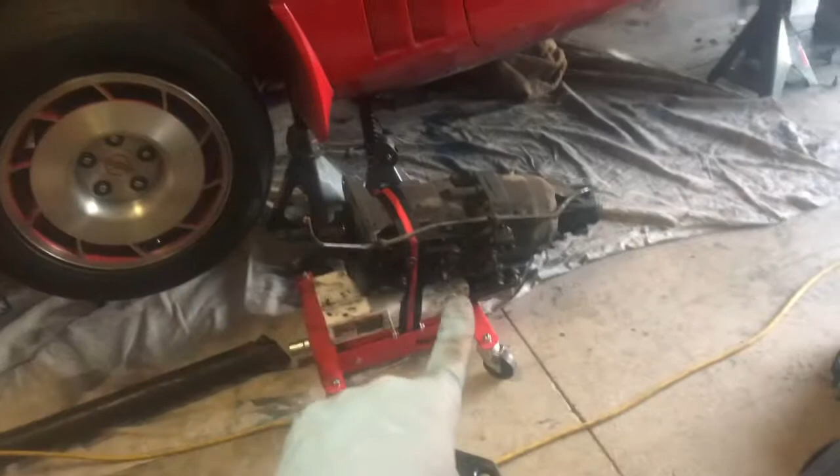Last video, you saw I took out the transmission. We're gonna do more to that, clean it up, make it look all pretty before we put it in. But in this video, we're gonna be taking apart the old clutch and putting in the new one. So, to the Haynes manual.

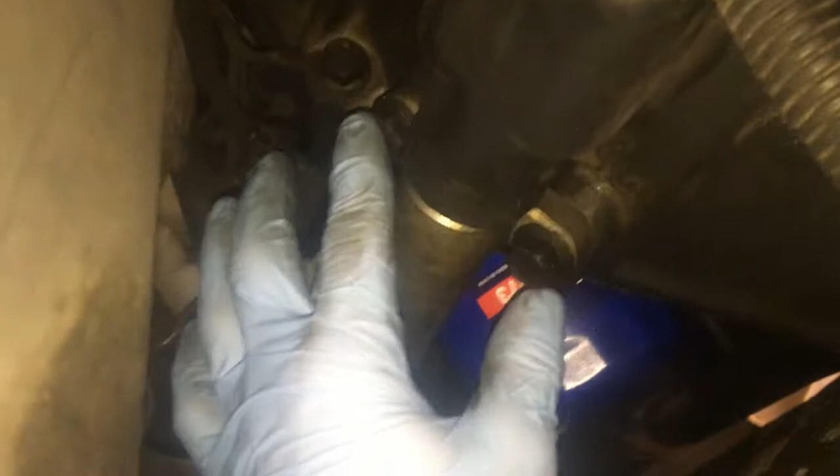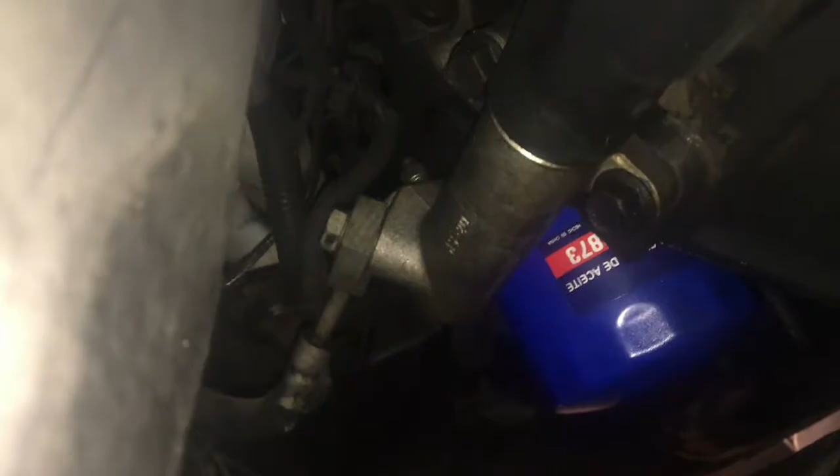First we'll start by taking out the slave cylinder and then the clutch housing. The slave cylinder is here on the driver's side. Looks like 15s, probably two of them. Don't need to disconnect any hydraulic lines, it looks like. So I'm just gonna take it off, let it hang somewhere, and that should be good. All right, got the clutch slave off.

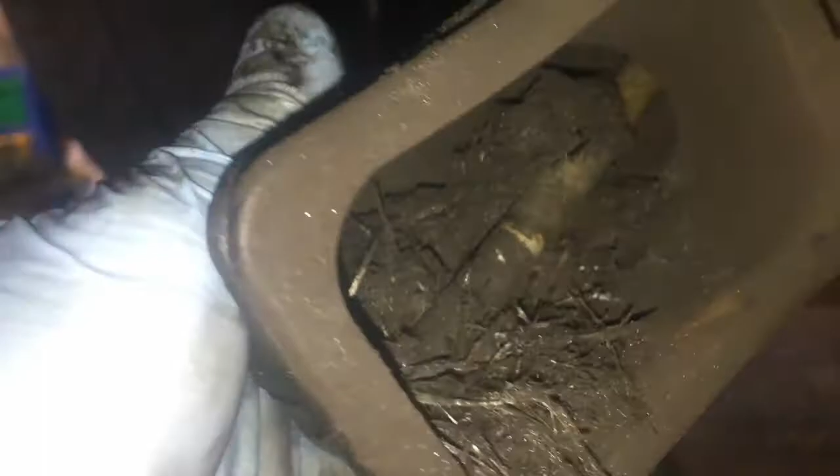Whatever this stuff is, it's like fiber, so much of it. This slave cylinder had a little dust boot, you just pop it out, covered. So I wonder if it's just this throw out, or the clutch fork, maybe the throw out bearing, whatever went. I think it's just this. Maybe the clutch is good, but I'm still gonna replace the clutch either way.

So now I gotta take out this clutch housing, or the bell housing as everyone else knows it. I'm taking off these bell housing bolts. I'm just gonna call it bell housing even though the Haynes manual says clutch housing. I had to take off the bolts facing the other way for this shield, whatever it's called. It's basically like a big dust shield for the bell housing.

So there's 2 bolts on either side, just like the engine and transmission bolts were. And then there's 2 on the top, it looks like, possibly 1 more in the middle. But it looks like that's all I need to get off.

Here's the bell housing area. I'm gonna take it out from another angle to get a better look at it, but here's the clutch, or the pressure plate I should say. Here's more of this debris stuff that we saw in the last video. It's way back there. Okay, this might actually just be clutch material.

Do I have to remove the starter to get this out? Oh, it looks like we got the pressure plate now, and then we can take a look at the clutch. You can get a little sneak peek there.

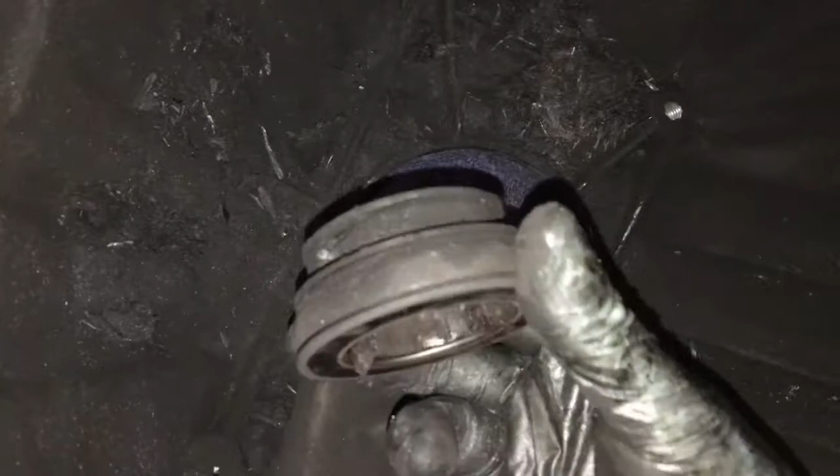So my big concern is what all this stuff is. Throughout this, I'm gonna try to figure it out. My first thought was clutch material, maybe some clutch and oil, but that's a lot, that can't be clutch. Possibly the slave cylinder, as we saw earlier. But look at this throwout bearing, it's destroyed.

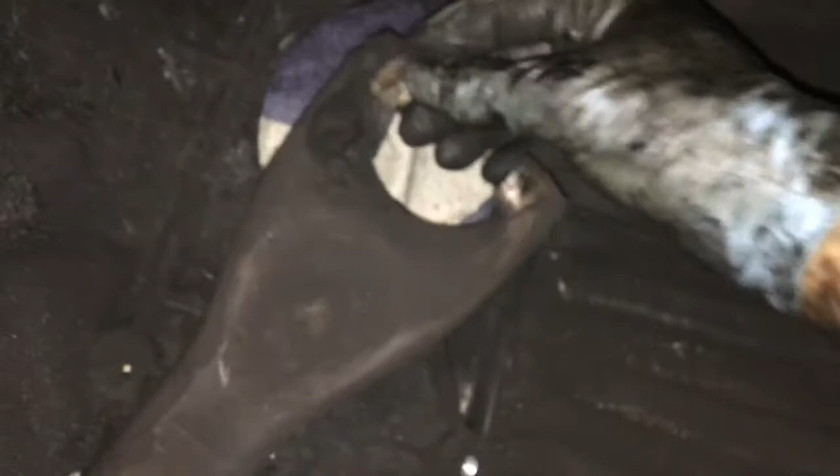You can see this silver metal stuff everywhere in here. So it looks like a lot of this material is from this, but I'm not sold that all of it was just from this. Although, this is absolutely destroyed. The clutch fork looks okay. I'm gonna hope that it's not damaged, because that would really suck.

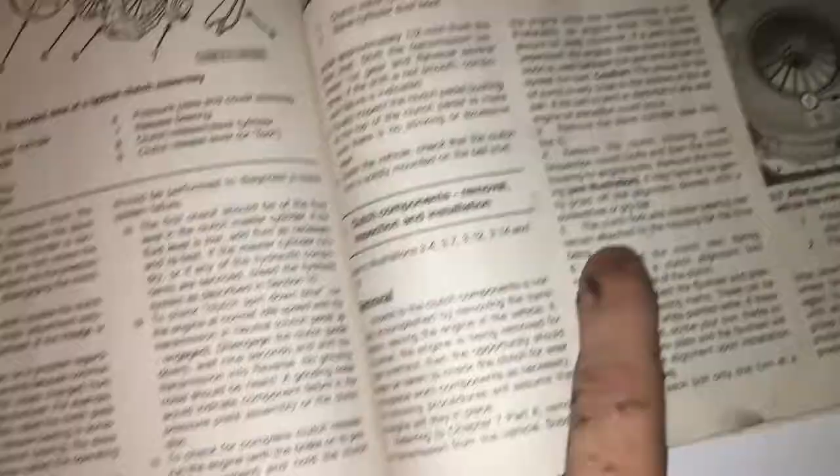The next part on the Haynes manual says I need to support the clutch disc with the clutch alignment tool. So I gotta open up the new clutch. I figured might as well show you guys what I'm throwing in here, replacing this old beat up clutch system. So it's the LuK clutch. I saw a couple comments on forums saying they were pretty good.

Here's the pilot bearing and clutch alignment tool. This is what we're going to be needing. I'll go ahead and show you. This is the throwout bearing. It looks a lot different from the old one.

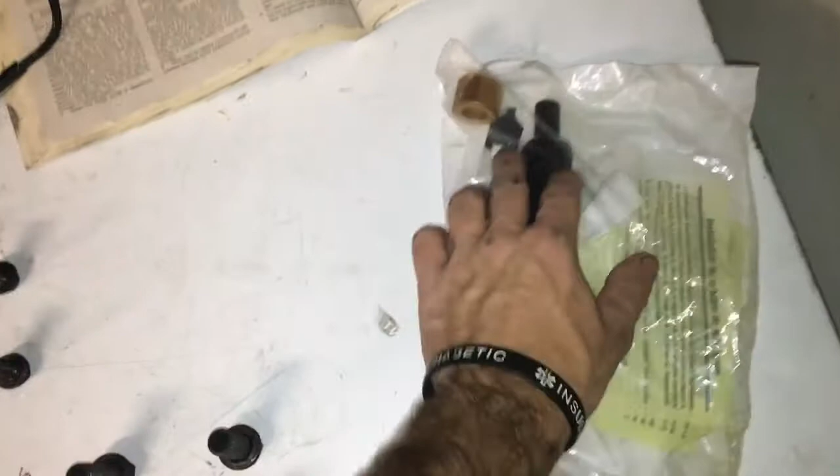And this is the pressure plate. I don't want to touch the clutch material with my dirty hands, but there's a glimpse at the inside of the clutch. So it's just a stock replacement, nothing fancy, but these stock clutches are actually known to be really good power-wise, they can handle power. Alright, so let's get this out. Oh, it even comes with some lube.

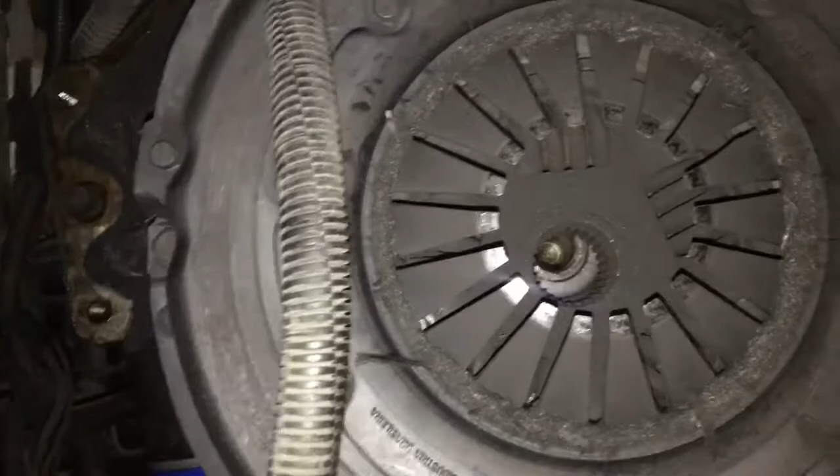Let's get this out and get ready to remove this pressure plate. Alright, we got the pressure plate here. Got my clutch alignment tool. I'm gonna try to look at my camera because I don't really have a good angle of this, but I just gotta line it up and slide it in. There we go.

So the clutch alignment tool's in. Now I undo the bolts. It's like one here, there, there, there, there.

It's like 6 bolts. It's gonna spin when I do it. It's only torqued about 25 to 35 pounds, but it's gonna spin. I'm gonna have to get creative on how I'm gonna hold it, but it's doable.

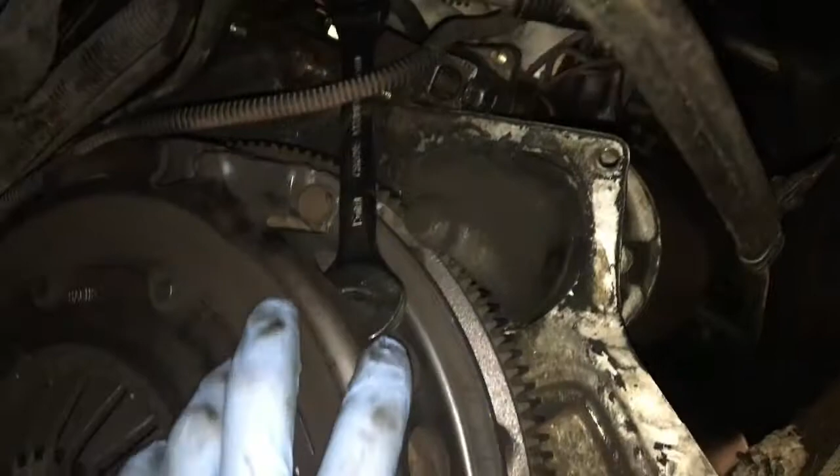Now to stop it spinning, I shoved a wrench in here and put it against some sort of bracket. That's what's stopping it from moving. I kind of did it on accident. I wanted to use a wrench and then I started spinning and it worked, so I didn't touch it. I just went around and loosened all 6 of them.

Now I'm going to use my electric ratchet to take them off one by one. You want to take them off evenly to avoid warping in the flywheel, I'd assume.

Alright, before I look at the clutch, first look at the flywheel. Not too bad. I see a little bit of marks, but doesn't look that bad at all. Pilot bearing in there, definitely looks newer, but yeah, doesn't look like anything's wrong with it, but I'm gonna replace it since I have it anyways.

I just rubbed against the clutch. Oh my, this thing is destroyed. Are you kidding? I think it's safe to say a lot of that material is this. That thing, oh my.

And here's a look at the pressure plate. Definitely some marks on it.

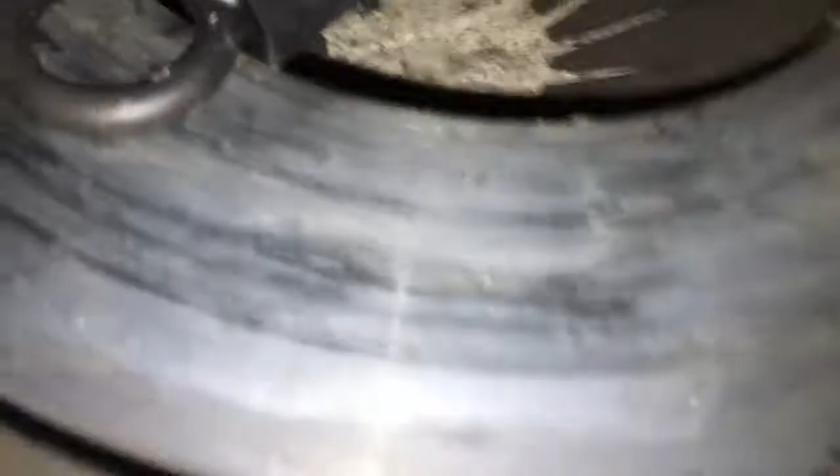Oh man, after seeing that clutch, I think it's worth it to get the flywheel resurfaced. Or maybe just do a light little touch up.

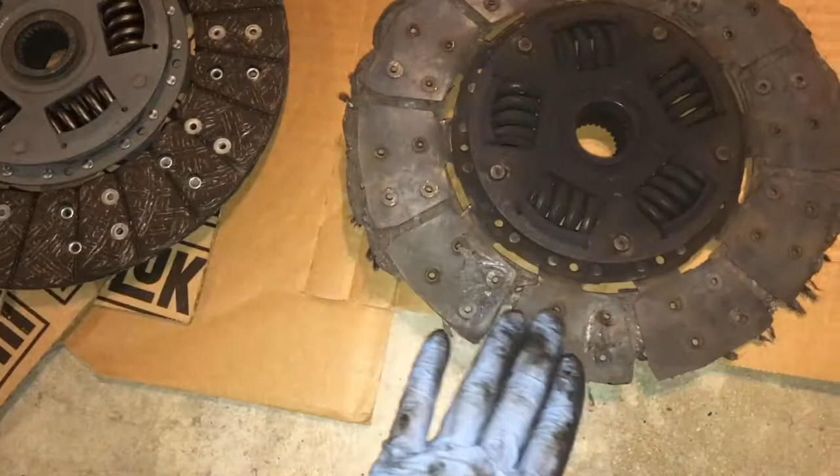But here's your problem. Here's the new one. Look at all of it. This is worn past the rivets. Like even some of the rivets are wearing down. Let me flip it over. I'm trying not to touch the clutch material because my hands are all dirty.

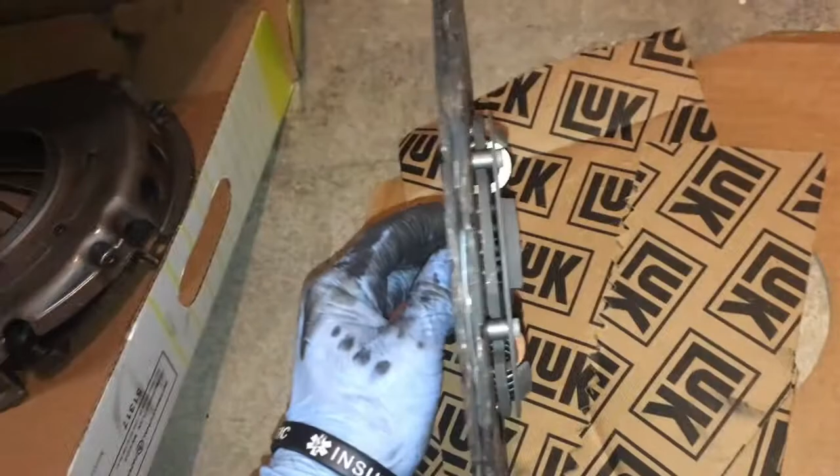Brand new one, absolutely destroyed one. This is where all this stuff came from. It's clear now. That's insane. Look, this one has like 2 layers to it. This one, absolutely mangled. That is insane.

So to assess the damage: clutch, obviously, absolutely destroyed, mangled. The throwout bearing as well, the whole bearing material destroyed. Possible the clutch fork needs replacement, probably not, probably be able to salvage that. It looks like the slave cylinder went bad.

I'm going to keep doing research, clean it up. Maybe it just got filled with gunk, but it's about $30 to replace, so kind of leaning towards just replacing it anyways. Who knows how old it is. I'm pretty sure it's been replaced at some point because this car has 150,000 miles or more.

Then from taking the car apart, we destroyed the second gear sensor. You can't really see it, but when I took it out, it fell in half in the transmission. So I got to go to a junkyard, pick that up, and put this back together.

I don't think that's actually messed up. And then this air hose for the exhaust, I broke it in half, so I'm just going to buy a rubber hose. I don't think this gets too hot because I don't see any discoloration like this, so I think just a rubber hose will be enough, with some hand hose clamps.

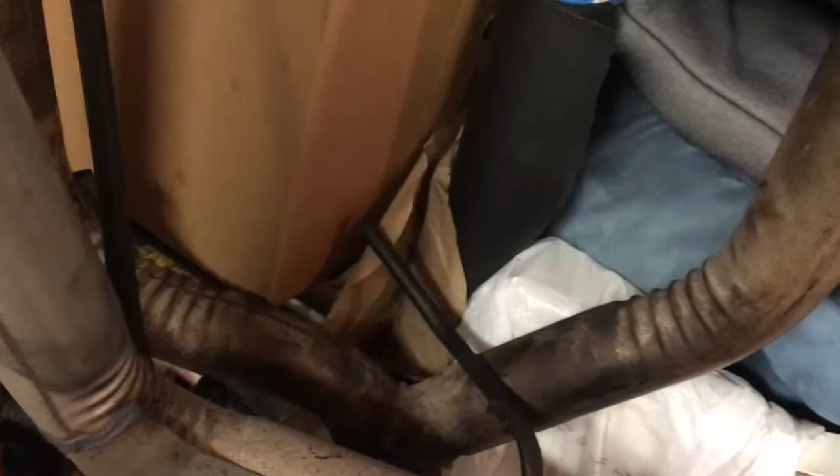But let's see, other than that, that's it for the damage.

So it's morning now. I ran my fingers across the flywheel, and the inside edge, just around the circle, feels rough, and it should feel really smooth. So I think it's worth getting it resurfaced. Plus, a lot of that clutch material has ended up behind the flywheel. So I'm gonna take off the flywheel.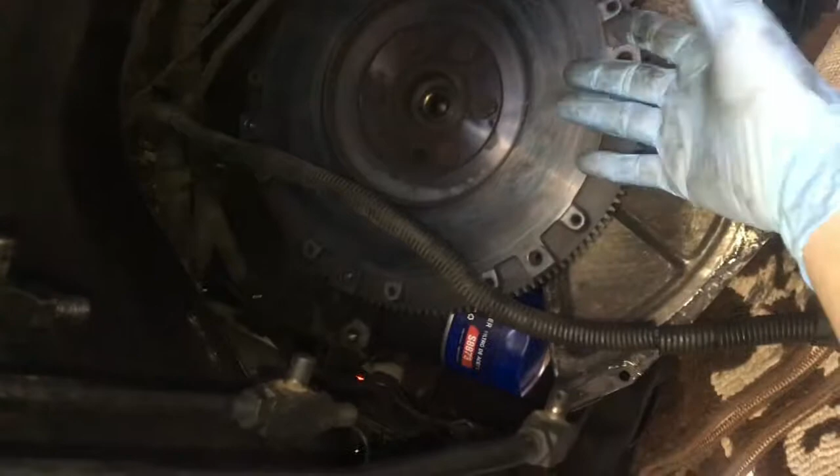I got my impact gun here. I'm gonna take it off and just try to get as much of that clutch stuff out of there. And we'll see if the rear main seal's leaking, but it doesn't look like it is.

So we'll take a look at what's behind the flywheel. Here it looks like this is the crankshaft. Looks like the main seal's back here. Possibly it's leaking, I'll have to figure out exactly where the rear main seal is.

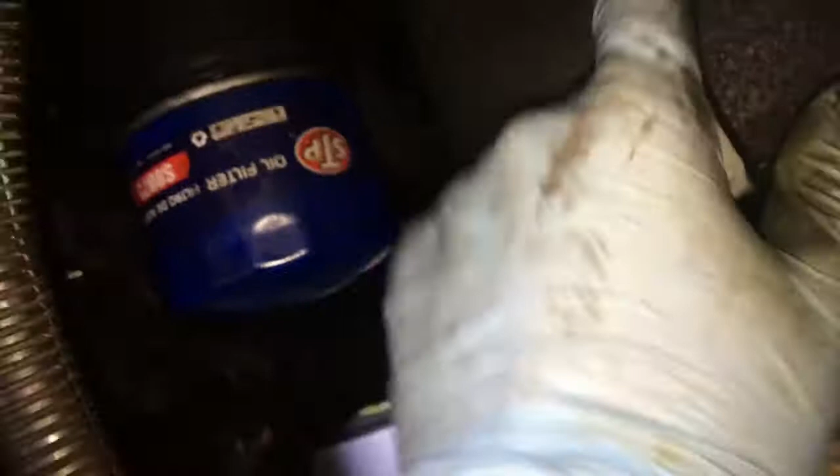Because if it's leaking, might as well replace it now. There's definitely oil here, so maybe worth a shot. I'll investigate some more. Some of the clutch material's in the starter, that could have been bad for starting it.

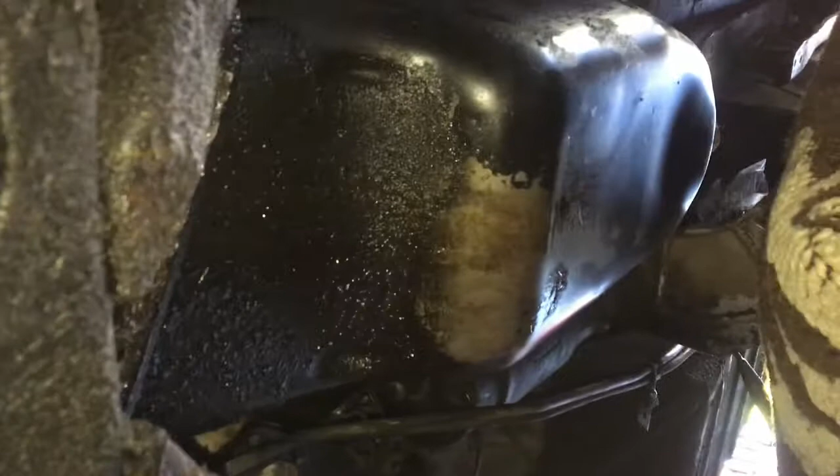I was going to order a rear main seal and replace it, but this car has a two-piece rear main seal. There's the top part like a normal one, and then the bottom one that goes into the oil pan gasket.

Because I know there's an oil leak. You can see all this oil. This is at the front of the engine. It is caked under this K-member. The suspension stuff is caked in oil.

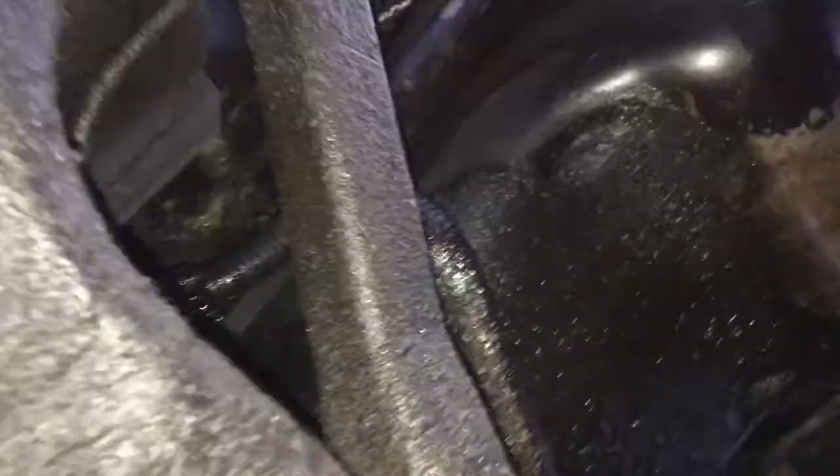But this, looking at it now that the rear main seal is exposed better, it definitely looks like the leaks from the front are coming down. It looks like it's still happening. It's most likely some sort of hose or something leaking, not the valve cover. So I did fix the valve cover leak, but that wasn't the only leak. This is definitely pressurized oil that's leaking.

So I don't really need to worry about that yet. That will be a different time.

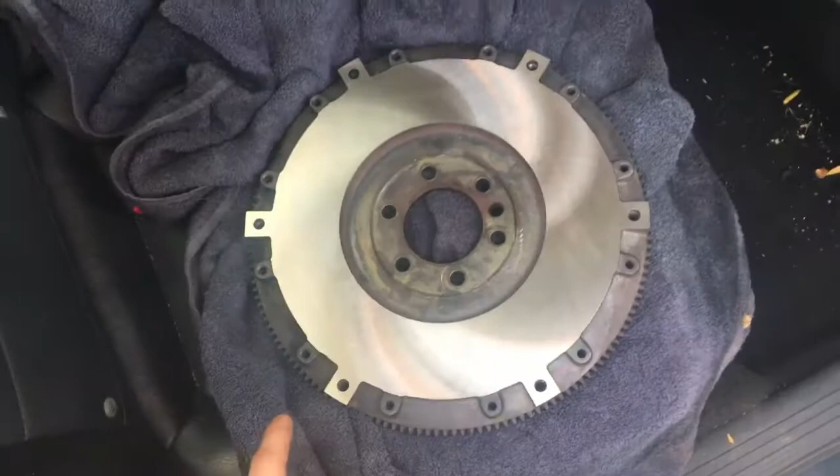So today I got the flywheel for the Corvette resurfaced at a machine shop. They're located in Riverside, called Arlington Machine or something like that. They did pretty good work. You can see all the little hatch marks.

I went to the junkyard, tried to pick up that second gear overdrive sensor, but the transmission was gone, so that was a bust. But I did pick up one of the flywheel bolts since it was easy to get to with the transmission gone. So I'm ready to start reassembling.

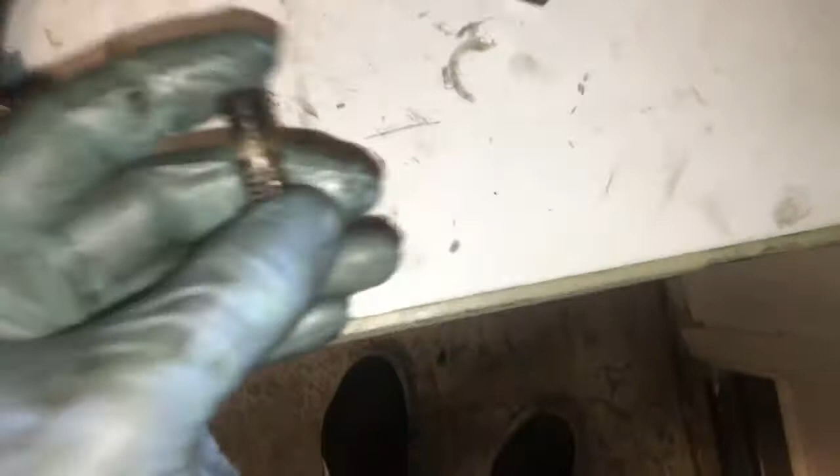Okay, so I just got the broken exhaust stud out. I'll have to show you guys the tool, but here's the tip of it. Here's the stud, you can see where it broke. This tool just clamps on and then spins it off freely. So now we're in business.

Alright, now to work on putting the new clutch in the car.

Alright, so I'm going to take out the pilot bearing. I'll have to get creative, but looks like a lot of people like to use a socket or something that fits in there and use bread as a hydraulic source to pull it out. Actually, guess it's easier with the flywheel off. Alright then.

Alright, so this is the old pilot bearing. Here's the new one. Now they don't seem to be directional or anything. Line them up, looks like they match. So we're just gonna see what happens when I slide it in.

Alright, resurfaced flywheel's in. Got this dust shield tucked behind it. The bolts are just snug right now all around.

I'm gonna pull up the torque spec. Alright, just got it all torqued. These heads are American size, but I only have metric stuff for 1/2 inch drives for my torque wrench. So I got it torqued to about 66 foot-pounds.

Alright, so I got the clutch here. Trying not to touch the material, but I'm going to put the alignment tool in it. And then I'm going to slide the clutch up to the flywheel, putting it into the pilot bearing. Something like that.

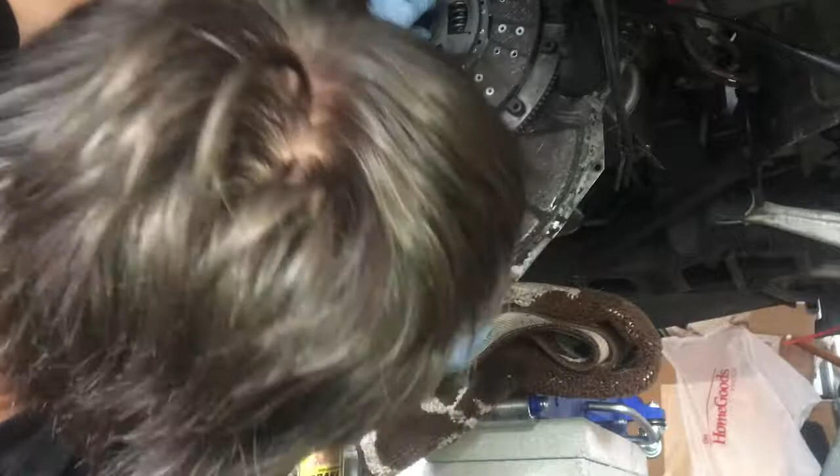Okay, so I got my pressure plate bolts, got a little mark on the clutch alignment tool. Get my bolts out, ready to be used. And then I put my pressure plate right up to it.

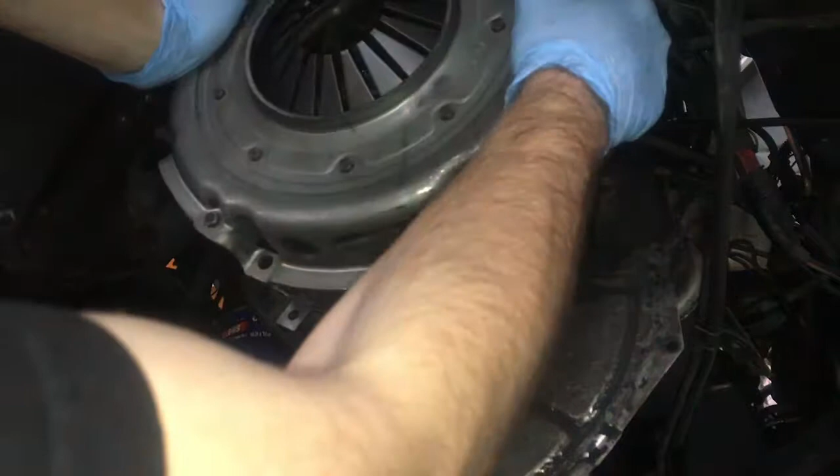Alright, got everything finger tightened. Just gonna do a quick little tighten with the ratchet, trying to go as even as possible.

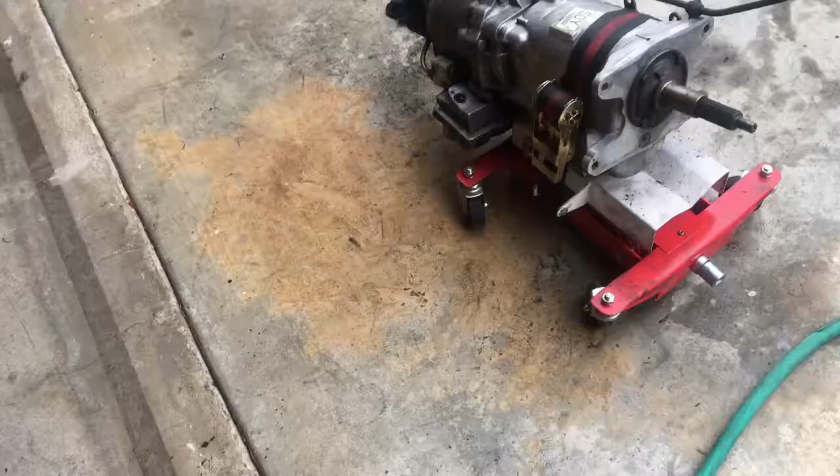Just finished cleaning up the transmission. A little bit of brake clean and engine degreaser from AutoZone, and then I had a couple detail brushes and some rags to wipe it down. But now it's not caked in oil.

Alright, so the pressure plate gets torqued to about 35 foot-pounds. Set my torque wrench, and then just go around in a crisscross pattern.

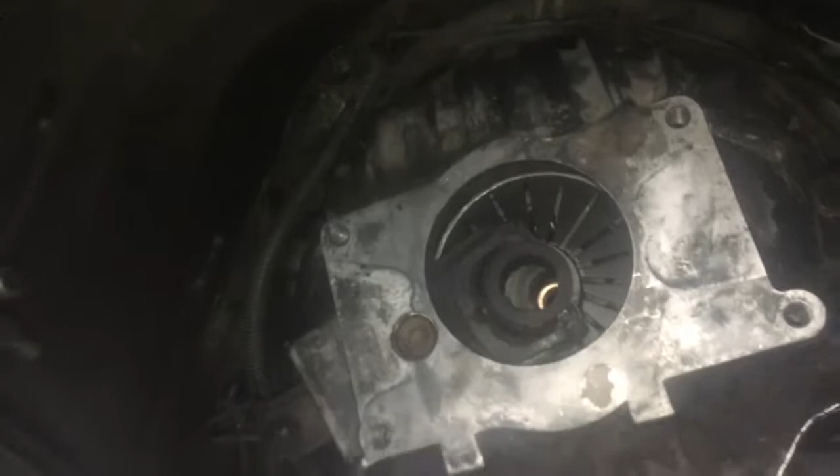Alright, so I have the clutch housing back on. It's just snug, not torqued.

So I spent a lot of time trying to put the transmission in, and it was coming up a few inches short, or about an inch short from bolting up to the engine. Realized I had to take it all apart. Found out the pilot bearing, when I installed it, wasn't perfectly straight, wasn't in there all the way, so that was my bad. So I got a new one, got this little 1/2 inch extender thing, and I'm just hammering it in. And it's almost in there all the way.

So I got it in. You can see the pilot bearing needs to be flush with that line on the crank. I don't know if it's the crank, it's the outside of the crank maybe, something like that. It needs to be flush with that line.

When I first did it, I didn't know. I only pushed it in not even a quarter of the way. Just pure, I didn't know.

I finally got the transmission in. It didn't take that long once the pilot bearing was actually installed correctly. You can see it's all lined up. I just used the electric ratchet to get it snug. So I'm about to go and torque it all.

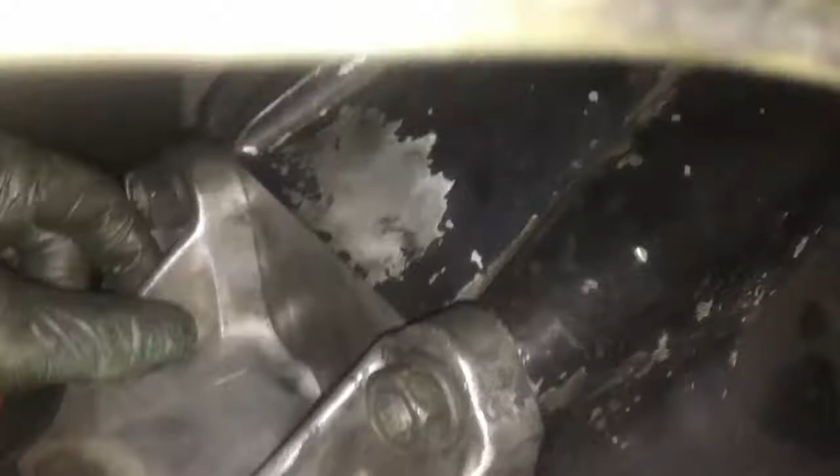Please, I can't thread this bolt.

Got the transmission in, and the C-beam way back there. This was like our 50th millionth time putting the transmission in this car in just one clutch job.

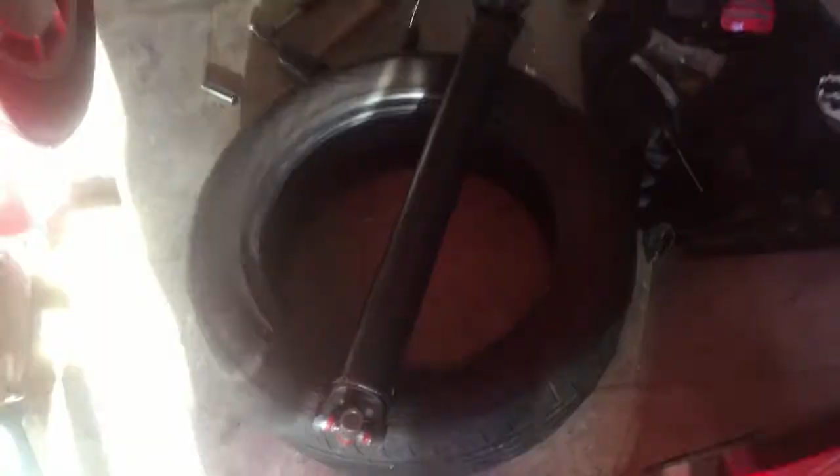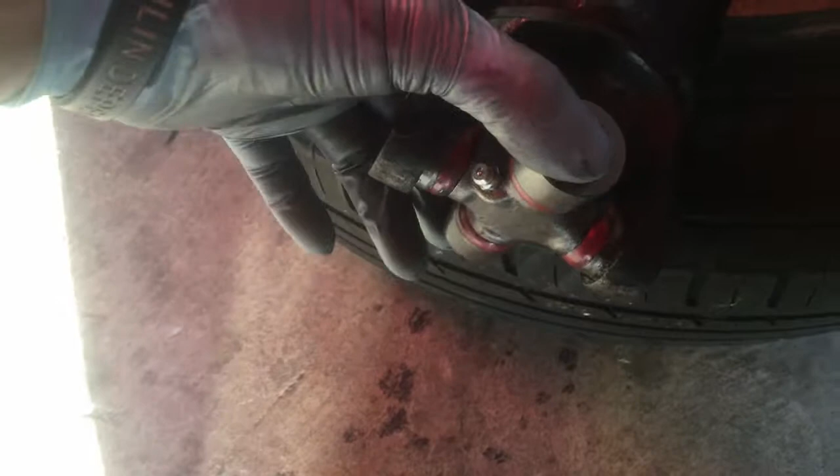So when I was putting in the drive shaft, the U-joint kind of exploded on itself. All the little needles, some of them cracked. So I picked up this new one. This one needs to be greased. I don't have a grease gun anymore, so I gotta figure out what I'm gonna do.

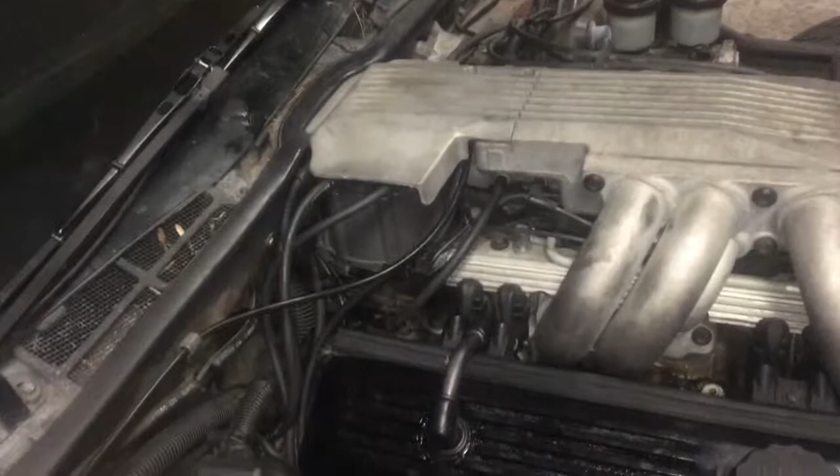And just like that, I got the distributor back in. When I got the car, the wires were pretty all over the place. I mean, it's not perfect, but it looks a lot better than it did before. Before they were just all like a rat's nest under here. Let me show you the other side, but basically, not too bad.

I just got to figure out what I'm going to do about greasing the U-joint, and then it's just the exhaust. There's little wiring for the transmission sensors and the shift linkage I need to adjust, and that's about it.

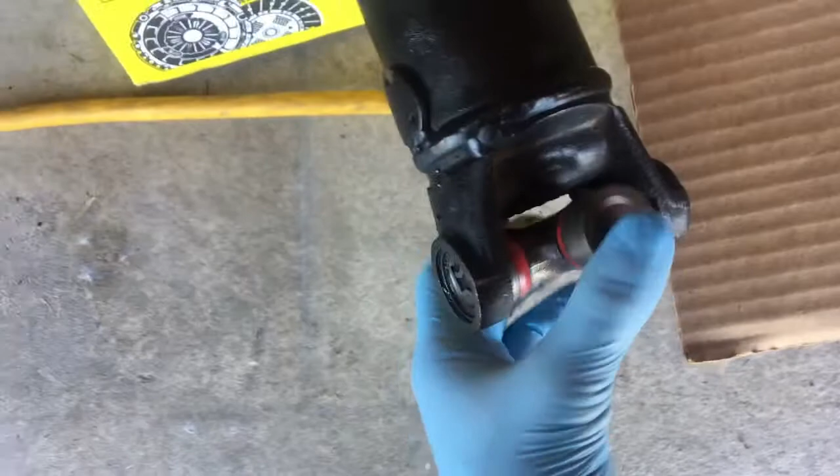Alright, so I got the new U-joint into the drive shaft. Basically the old one fell apart, so I had to get the new one in, and I just decided to replace one instead of both of them. Yeah, I know, preventive maintenance, but you know what, it's not broke. I'm not gonna worry about it. At least it's not that bad to get out anyway.

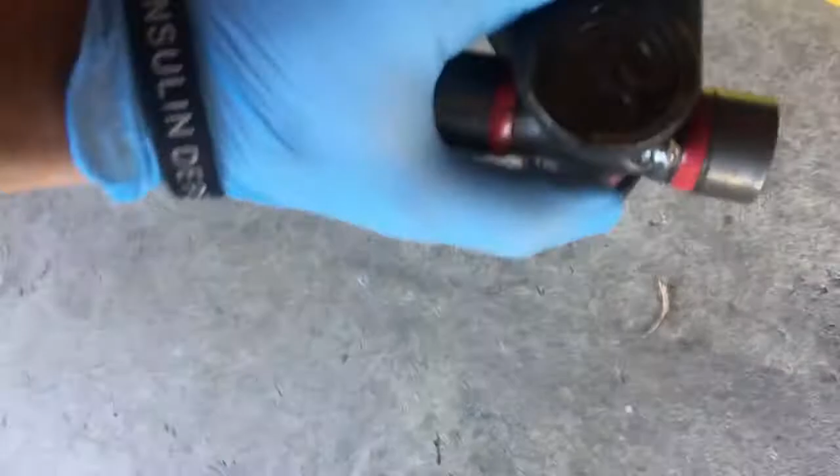So then I took it to a shop to get it greased, so it's all greased now and it's ready to go in. Alright, so I got the drive shaft in.

Right now the shifter doesn't really do anything. It's not hooked up in the bottom. Hopefully you guys can see. Not really, but the arms down there aren't connected to anything. You can see in the Haynes manual, here's the three.

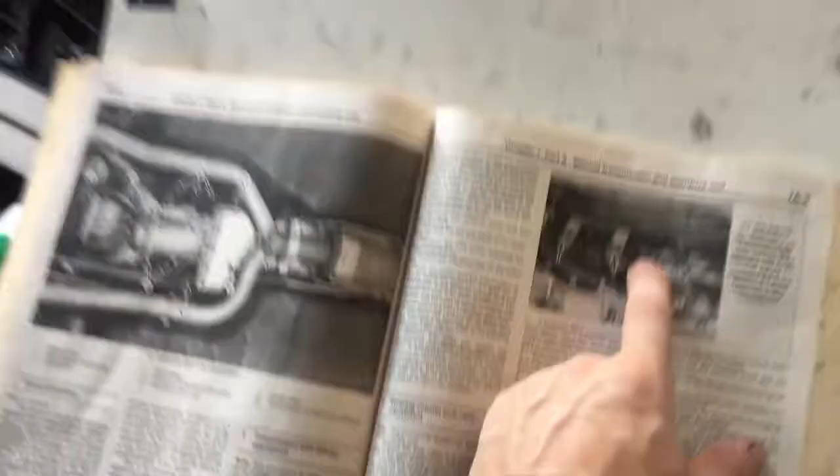They're not connected right now, so I gotta connect them, and then I have to adjust it so it knows what gear it goes in. Because I accidentally moved them, I had to deal with that. But the Haynes manual says, let's see, adjustment. And I gotta take out, I'm just gonna follow this.

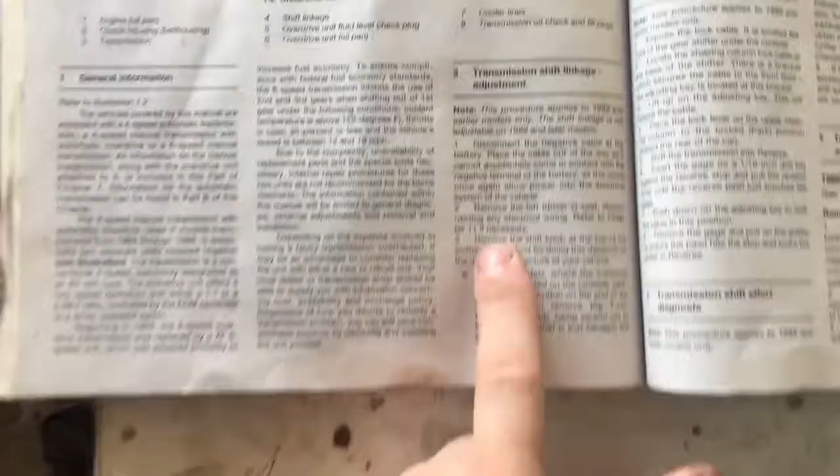So I gotta take out this driver's seat and a couple other center console stuff. In the next clip, I'll show you guys what I did up top, but basically, if you ever take out the transmission, you gotta adjust it.

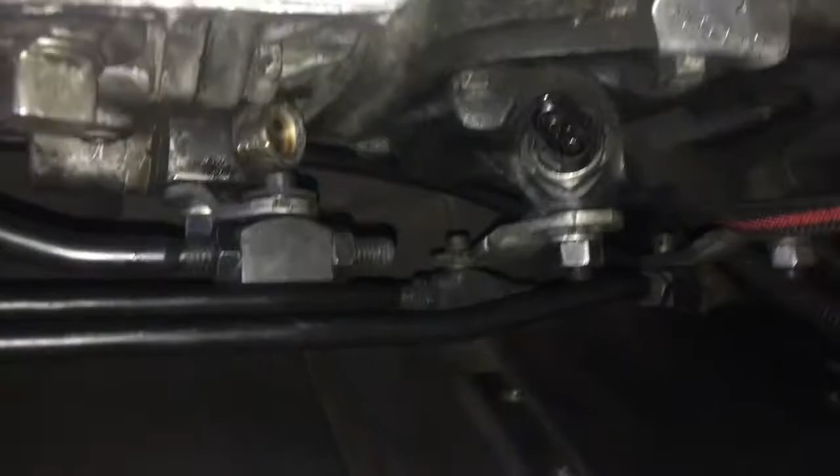This is how it looks from the upside down point of view. This is neutral in the transmission. Basically, everything is straight up. And this one's a little to the front of the car. So now they have these little washers and clips, so I'm just gonna lock these all into place.

So I had to take out the driver's seat. I was following the Haynes manual a little bit to adjust it so neutral would work again. So I took off all this stuff. It's all loose right now, but under here is where the three shift arms are.

But basically my problem was just the transmission was in gear, even though the shifter wasn't. So once I got the transmission, I had my dad come out and help me, and we got them both into neutral, and then it started working, and now it's all good.

I'll show you real quick. Let me sit down. You can see there's first, second, third, fourth, and then you gotta go up into reverse. Now it's kind of hard. I would just assume that's because there's no fluid in here, but not too bad.

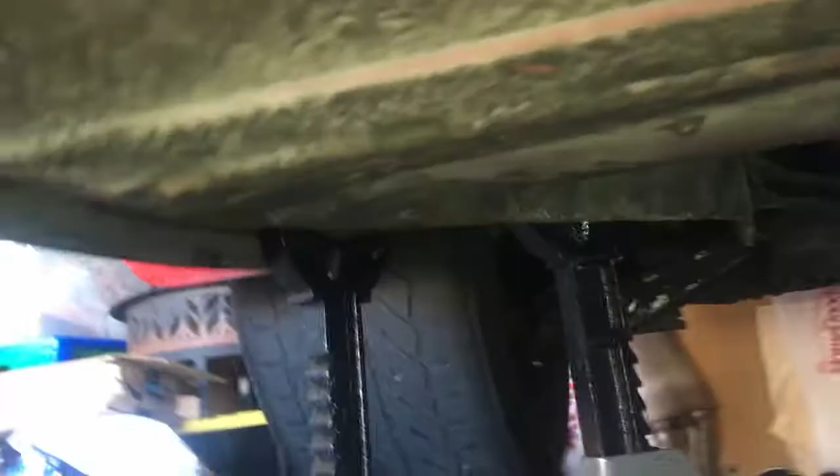So now I'm going to get the clutch pedal working, and then I'm going to start up the car and make sure I don't hear this loud throttling noise or anything like that. Alright, after the help of my dad, got the slaves bled.

Initially I thought the slave cylinder was bad because the piston wasn't moving anymore. Turns out I just didn't have enough fluid in the master cylinder reservoir. So make sure you keep an eye on that. Now the pedal actually has some feel to it.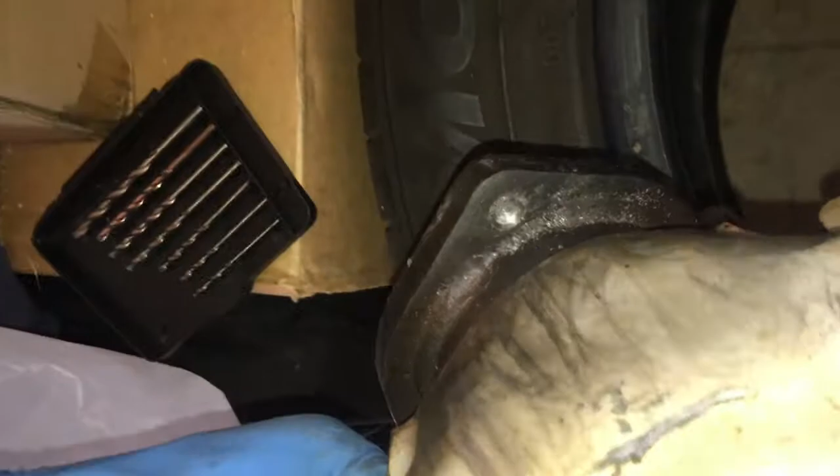So, from doing a clutch job, somehow I got the passenger side exhaust manifold out. I was replacing the studs, as you saw in the last video, and one of them broke. Then this one broke where it's so small my little extractor tool can't fit there. So I've been trying to drill it out and I'm almost done. I just gotta charge the drill up more because it ran out of battery.

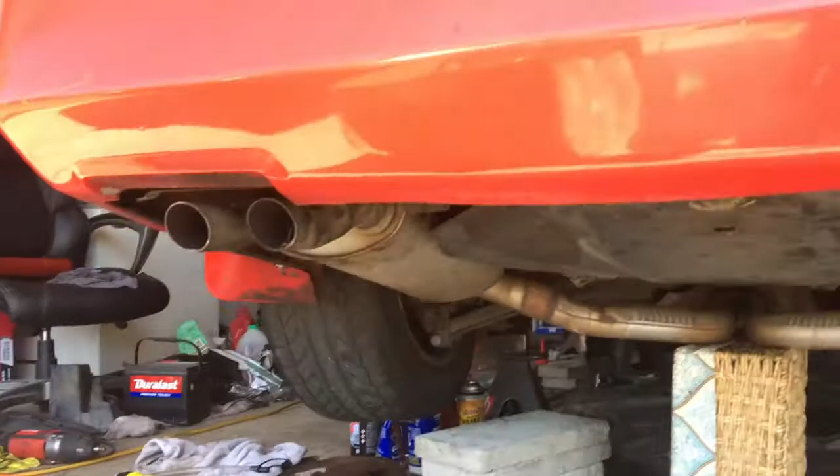Here you can see it's gone. In the meantime, while the drill's charging, I just got the exhaust hooked back up, just the portion after the catalytic converter. So you can see we got that. Once the drill's fully charged up, I'm gonna go back to taking out that stud, and then the exhaust goes on, and then the car's all good to go.

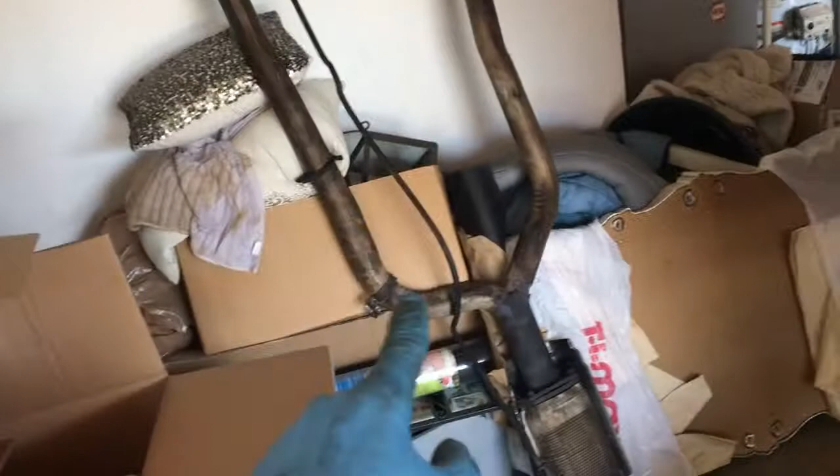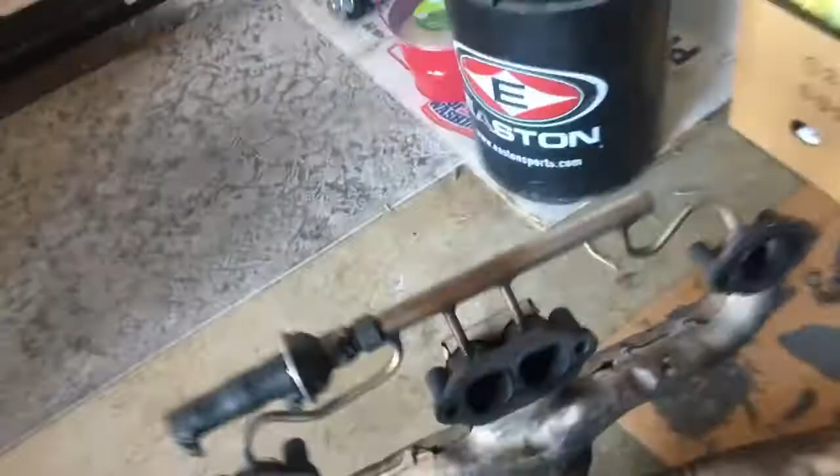Alright, so I ended up buying a tap and die set from Harbor Freight, a bunch of different left-hand drill bits. I went through a lot of drill bits, but I finally think I got to an okay solution. Let's see, this is a good one. This is the jank but good enough.

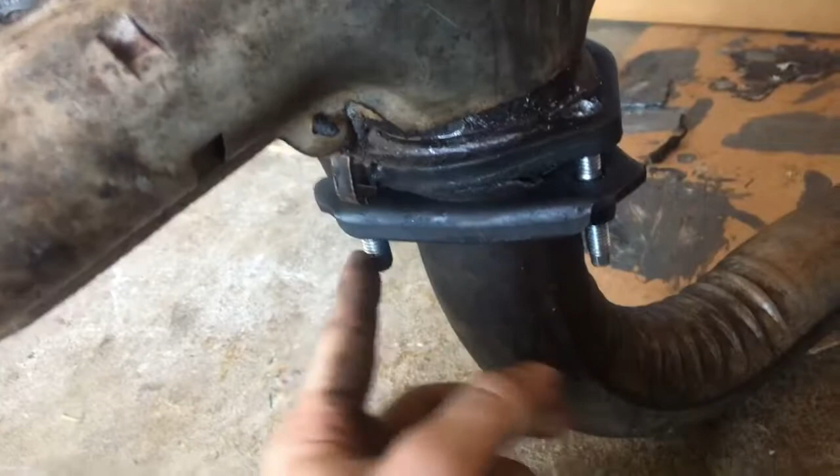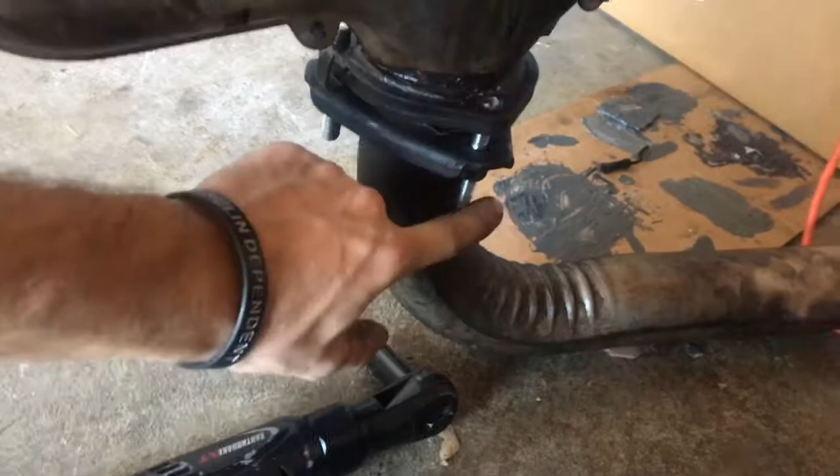So this is the normal one, it's a M10 by 1.5. This is an M8 by 1.25 that I had lying around, and because I didn't drill perfectly straight to get the stud out, part of the stud's still in there, so I used a tap to tap the threads in, because it was perfect size for this. It's a little crooked, but it seems to be holding the seal just fine. So I think I'm all good to go.

And the garage is empty because the Corvette is outside. So I didn't show you guys me putting the exhaust on because it was...

Actually it went pretty smoothly, but then I went to start it up and you could hear the throwout bearing, I believe it was, because you could just hear it chattering, like some clutch chatter, and I got really scared. I thought maybe the transmission was gonna have to come out again, and also the pedal was really soft, so I bled it a ton of times, and now it's finally working.

I've taken it on 2 test drives now, got about 30 miles on this new clutch, and it works great. I won't show a video of me driving, maybe in a future video, but that's basically how you replace the clutch in this Corvette.